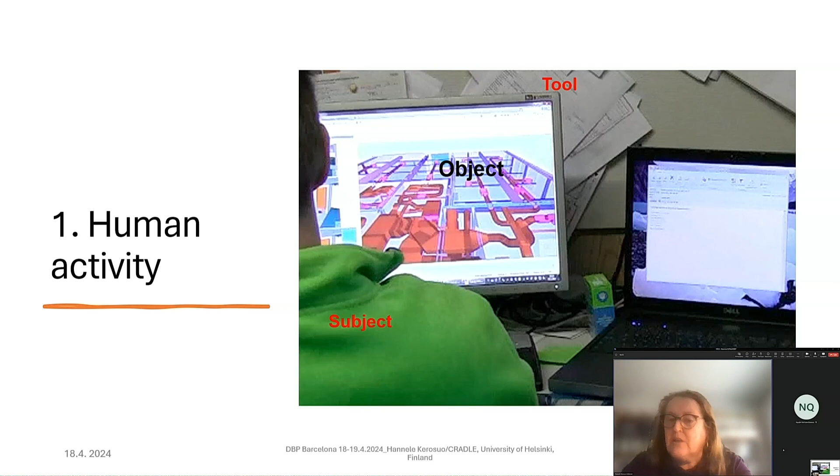The subject is certainly a member of some community or other, related to some other subjects. The community has also agreed on some division of responsibilities between them, as well as some rules. On the following slide, I will present the famous general model of human activity created by Professor Engeström. This is a very well-known model and used a lot in various places.

And as you can see, the object-oriented activity system is constituted of subject, object, outcome, instruments, rules, community, and division of labor. And the subject may be an individual human being or a group.

And then what we need to know about the object of activity is that it is more than the material or physical object. It also involves the purposeful target and motivation of the activity. It is something given by our context, and it's something we are anticipating. And what is important to know about activity systems is that it is constituted of relations.

They are not categories as they are sometimes understood, but they are relations interacting with each other within its socio-cultural environment that is constantly challenging these elements of activity. So activity systems are connected to other activity systems in real activities and practices. So there are two examples of connections between design and construction.

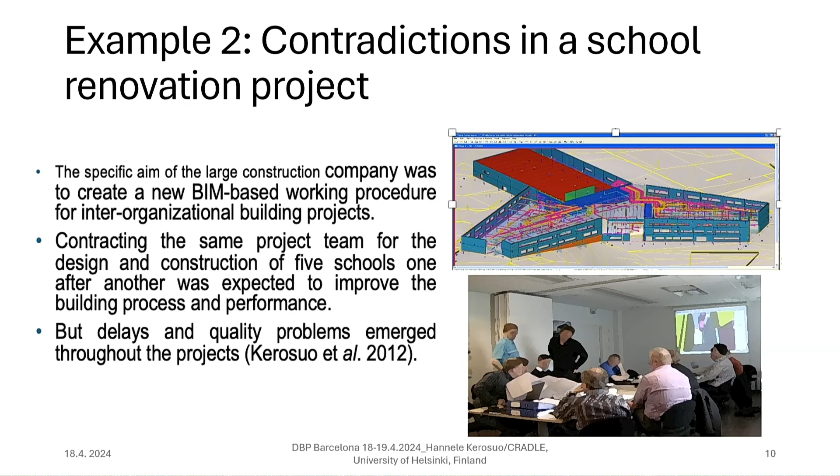So there was a school project where they were implementing BIM. And I think we have to go to the next slide so I can tell the example properly. So the contradictions emerged in this process between interfaces of participants, and they emerged in the interface between design disciplines, so that when they were running BIM models, there were real design errors, but they were difficult to see, there were plenty of them, and it was difficult to separate them from technical errors.

And even if they used this integrated model, IFC model, and as a consequence, shared use of the integrated model, they needed to create a special meeting and a series of them that lasted quite a long time, and also made the process slower, with some consequences to the building processes, so that in the interface between design and construction there were disruptions, because designs were handed over late to the construction sites.

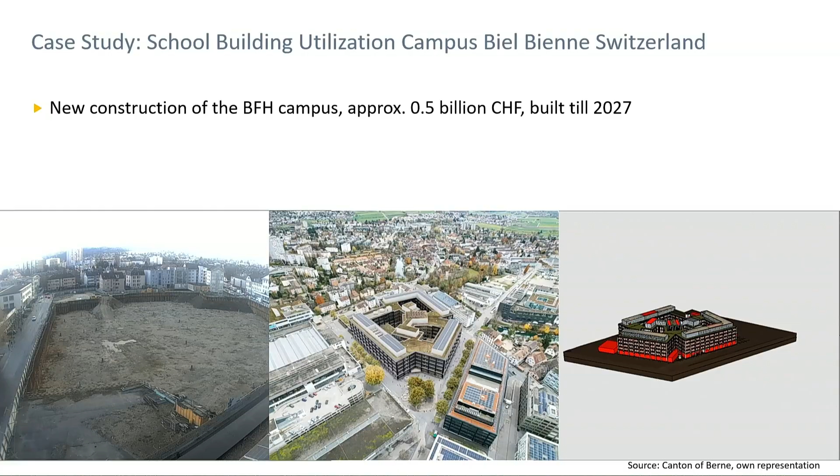So in 3 years it should be built, and the question was, we have maximum capacity while the term or the semester is going on, but what happens in between? I think you can see the bushes going through the floors at every university in the lecture-free time. So that was the main research question. What happens in the lecture-free time? What do we do with the rooms? What do we do with all the theaters, etc.?

What do we do? And yeah, that's exactly the point, how to maximize the use of this building while maintaining flexibility and modularity. So that was one of the main questions, and that led to some interesting questions, because the building permit is just for one purpose, education, and not for renting it out to the public or as a startup space or whatever. So it's just for educational purposes, the permit. What happens if somebody hurts itself in a startup space, which is in the university?

So interesting questions. So the fundamentals, I'm just clicking it through. I'm not sure about the time, but you give me the time. So left. Oh, okay. Okay, good. Got a heart attack, okay.

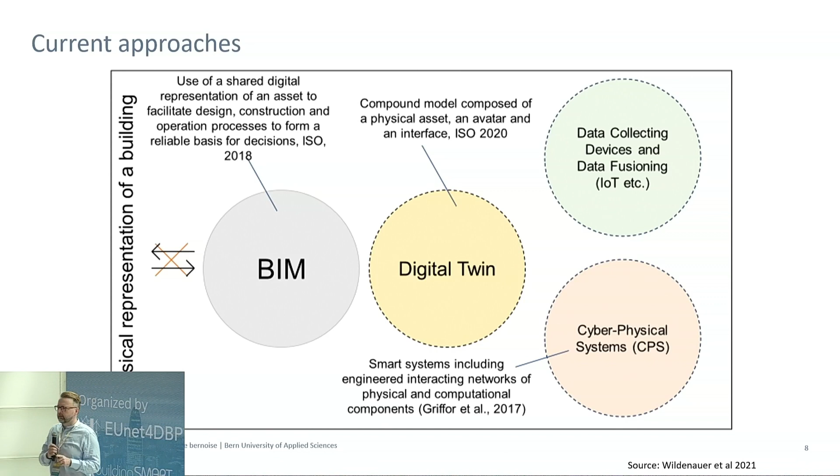If you talk about BIM, let's say we have 150 people here, we will have 160 different definitions of that. Exactly the same with the digital twin, cyber physical systems, and the data fusioning, as we called it, to get all the data necessary for the building. So what we need is more like this approach. We need to combine everything. And it will get more clear when I show the next slide.

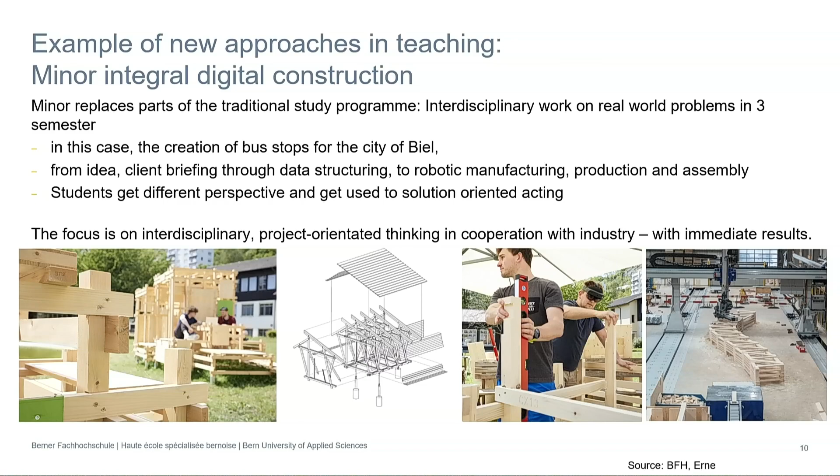So in this case, for example, the creation of bus stops in the city of Biel, we engaged the municipality, the community, local companies to come to schools and do the project with the students in the semesters. So from the idea, the client briefing through data structuring, the robotic manufacturing, those are our facilities, not the last one, but the first three images.

Production and assembly, we're really focused as an applied science university on what's going to be done actually. And the students get different perspectives and get used to solution-oriented acting. So by this, I would like to put the focus on the interdisciplinary, to have project-oriented thinking in cooperation with the industry. And that's really important, cooperation with industry. So industry, public and private aspects. That's what we do. In Biel, we try to be the pivot in the middle.

So just to finish, I think it is really important to say that the students, by doing this, have much more social skills than before. They focus on collaborating together, talking to each other, and the projects are only the intermediary aspects. They focus more on the processes, and I'm really happy that today we're focusing also on processes and not only on tools. Thank you very much.

Thank you, Matias. Any questions? Maybe I have a small question. How long have you been implementing these teaching methods in your university? And have you already seen some impact in terms of student satisfaction or also employability?

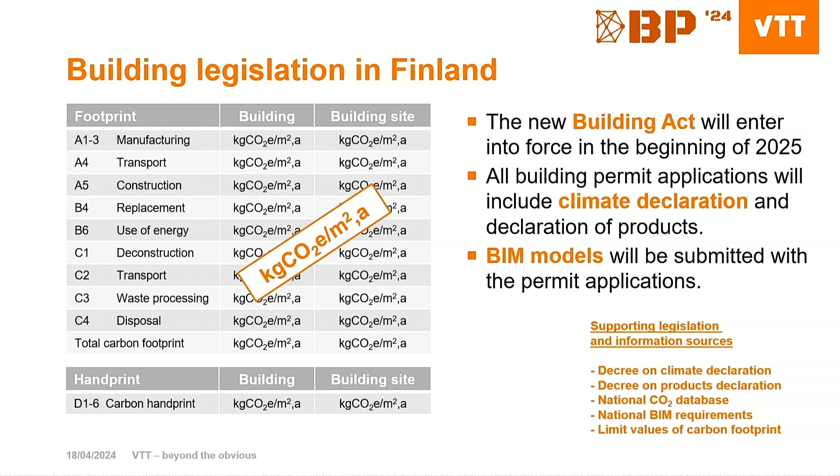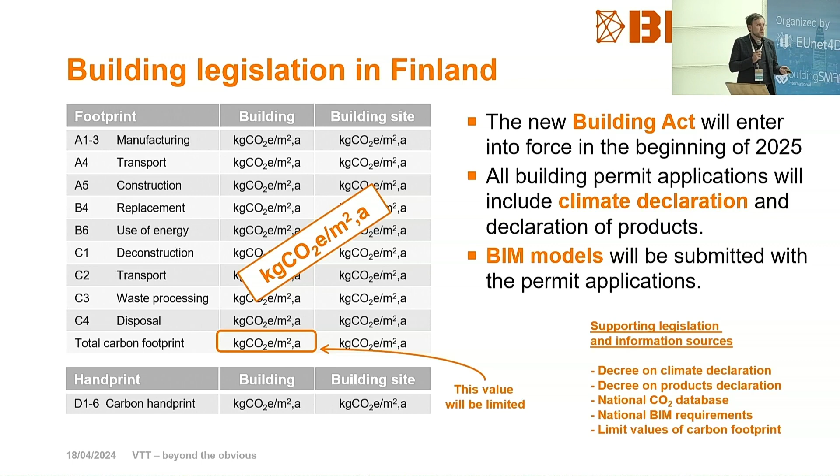And then limit values will be coming at some point, and these values will be limiting the total carbon footprint. So that is kind of expected, but we still don't know what these values are going to be. Well, if we look at the Finnish emission database, it is very similar to Ökobaudat or other databases that are around, or the Environdec collection of EPDs.

We have different materials and different impacts, usually in various units: per square meter, per cubic meter, per kilogram. If it is transport, it could be per kilometer, or per ton kilometer or something like that. So we have these kinds of impacts there. And some building services are actually very much simplified in the Finnish database. You don't really need to have them in the design for the building permit. You can just calculate this per square meter.

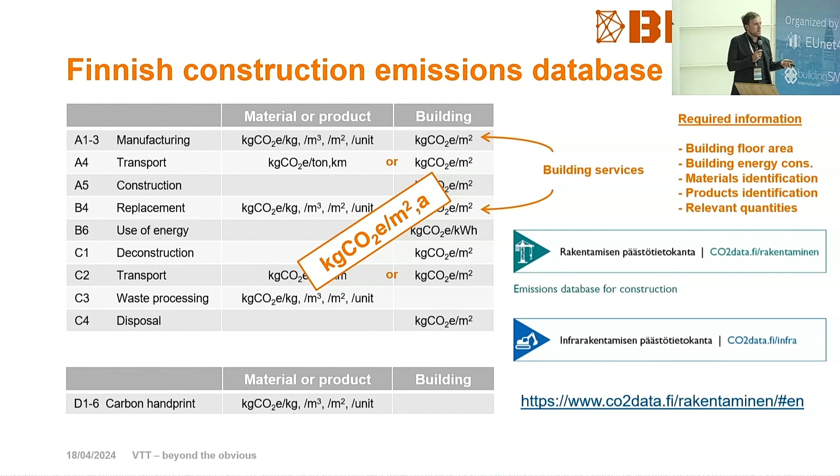You can take the value from the database. So at the end, you will have to end up anyway with kilograms of CO2 per square meter per year. And this can be done pretty much automatically. So we try to develop this kind of proof of concept tool where you feed in the model. It could be IFC step file, or it can be JSON, and with some connection to dictionaries and databases, you will get out JSON output usually with the results.

There's no possibility to demonstrate it as such because there is no user interface here, as you see. Everything is running in the background somehow. So it just looks like that. But there is a GitHub, you can download it, you can experiment with this. Basically, this can be running in the background of some administration service, or it can be some other tools integrating this thing.

But obviously, you are wondering about this quality of model data and how we are handling it and how we are making sure that what we predict is not really giving false positive values. So it is not unconservative. It is always conservative. So we have these points here that we are addressing. If it is missing material identification, we are still taking some material from the database, but we are always making sure that it is the highest possible material that can be used for this type of element.

If we are missing quantities, we are trying to calculate it with some conservative approach. If we don't have the exact material name that we are expecting, we have a mapping dictionary now, but we are now experimenting with large language models in the ACCORD project. So probably we will have this AI in the background.

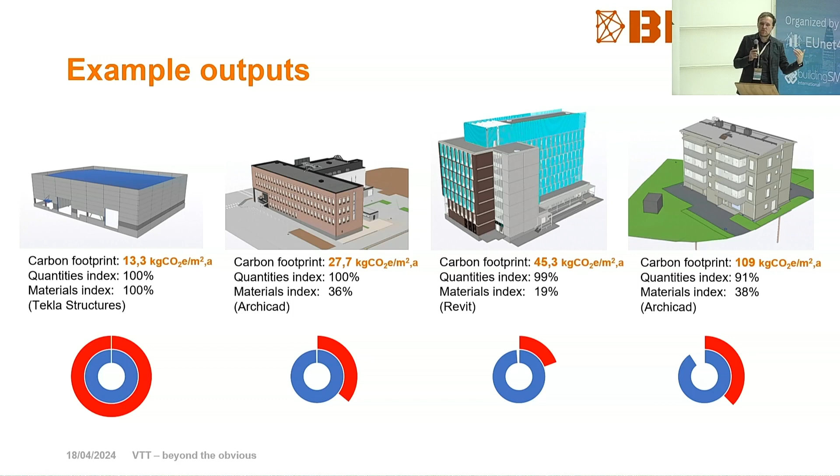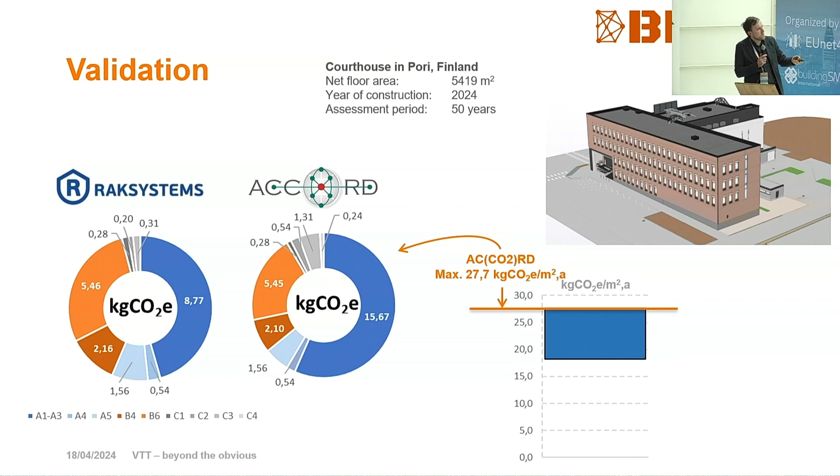Then we have tested it against a building. This is the courthouse in Pori, where the LCA was also done by professionals, by some software and experts, and they predicted 19 point something kilograms per square meter per year, and in this tool the maximum value was, okay, maybe I have it here, 27.7. Also we can get a minimum value actually, because it is taking from the pool of possibilities, so it was 18.2, and the official calculation was 19.3, so it is somewhere in the range.

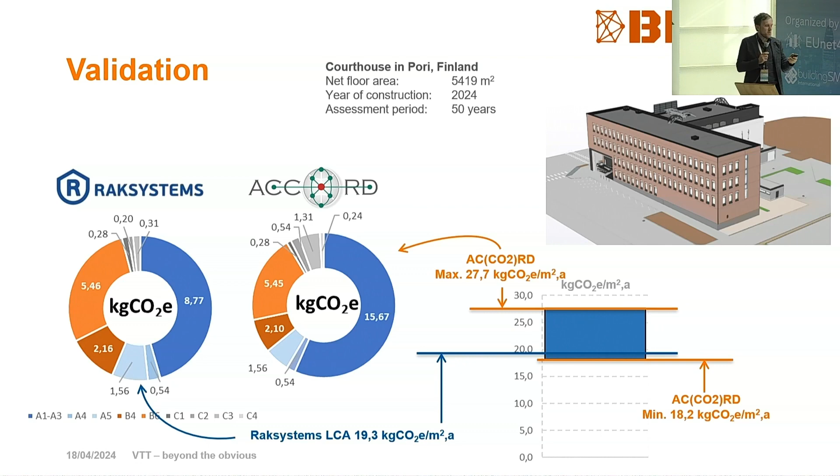I mean, if there is a limit of 30 kilograms per square meter per year, this calculation will pass, and you don't even have to pay the license and experts to do the calculations for you, because the model data is already showing that this can pass 30. If the limit is 25, you say that it is not passing, but it is possible to maybe improve the model to get better values. If the limit was 15, it is not passing, and you will have to not only improve the model, but probably redesign something, because even the minimum value is higher than what you should be getting. So this is the idea, and this is a proof of concept tool.

So of course this is the development stage, but we have it published in GitHub, so you can study it and try to maybe contribute with some ideas. It is adjusted to Finnish regulations, and we are planning to integrate it with machine readable rules for checking these limits. And we are now discussing with Solibri, Cloud Permit, and Future Insight if we can integrate it in some larger systems. So thank you very much.

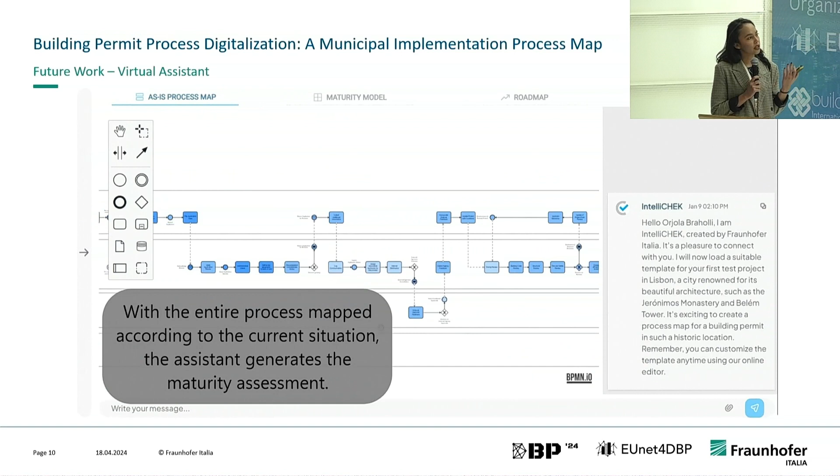And then the user can describe each step of the process. And then the virtual assistant will do this definition of the process steps and also of the current level of maturity. And once the process is completely done, the total current process of the building permit, the chatbot creates the assessment of the 4 categories that we have. And that's all for today.

Thank you, Orjola, for your presentation. Any question about the CHEK maturity model? Thank you for the presentation. I wonder if this maturity model is country specific or CHEK project specific, or do you intend to use this tool for every country? Also, is it at a national or municipality level, or an organization level? Because I noticed that there's an organization part of it. Do you imagine that it could apply to a specific organization if I want to adopt some level of automated compliance checking or digital building permitting? Is that suitable? Thank you.

Yeah. So we have 4 municipalities in CHEK from 3 different countries, and we did a lot of research on how building permits are done in different countries. So this is not specific to one country. The idea is exactly that we can scale this for different countries. It's more done at an organization level, not so much the national level, focusing more on the municipality or an organization that wants to implement a digital building permit. I think I answered your question. But yeah, the idea is that it can be as scalable as possible. The maturity model is not just related with CHEK. The roadmap is more specific, but you can also adapt it to other technologies, of course.

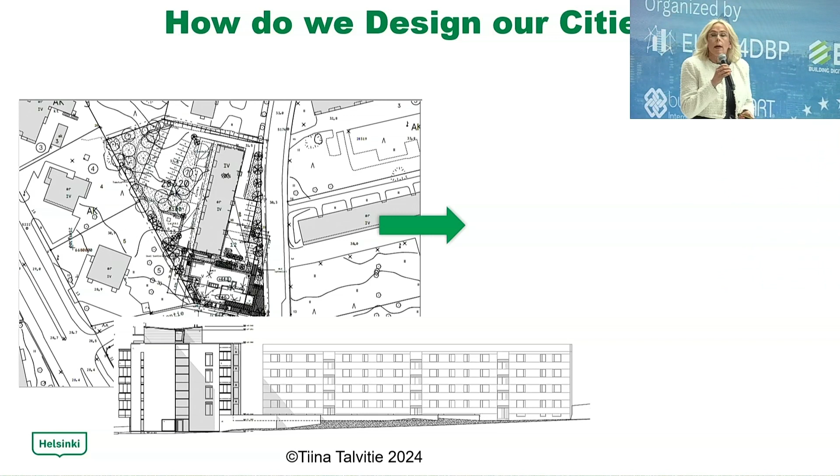And how do we design our cities? Here on the left, you can see materials related to the building permit process of a new building. The same material is used in a neighbor consultation. It's not so easy for the neighbors to understand how a new building would look in reality when built. How high is the building? How does it shade other buildings? Or what is its suitability to the landscape or to the surrounding nature?

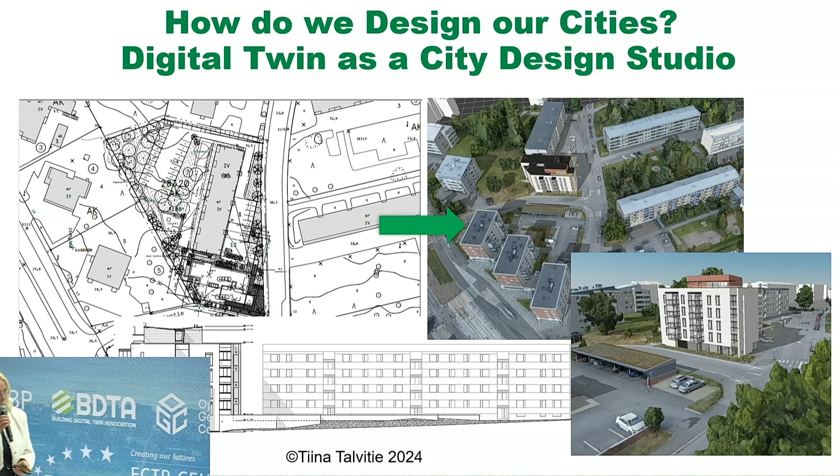How about if we would have a city design studio, likewise when designing cars? Here on the right, you can see the same new building embedded into our Helsinki 3D city model. In a digital twin platform, you can rotate the model and choose the viewpoints you like. The neighbors can also leave their comments related to neighbor consultation through the same digital twin platform.

So I ask you, what is the smart city maturity? How capable are we at utilizing digital twins in daily operations in our cities? Actually, how many 3D city models are integrated into cities' urban processes? Well, I think technology development is pretty fast, and we also have advanced software available. So why is the deployment struggling despite the advancements in technology?

Well, when commuting in the morning traffic to work, whether you go by your own car or perhaps you use public transportation or perhaps you go by bike, how often do you think about the technology of your transportation, horsepower, power transmission or something like that? Or do you more concentrate on getting to work on time, the comfort and safety of traveling?

Well, technology itself is not so interesting for the users. Technology is a great enabler, but it's not so easy to sell and convince customers of technical issues without practical use cases with benefits. So, would it be easier to start from the user needs, covering user stories from real users? Because users are always the best experts of their own work. So why not involve them in development work?

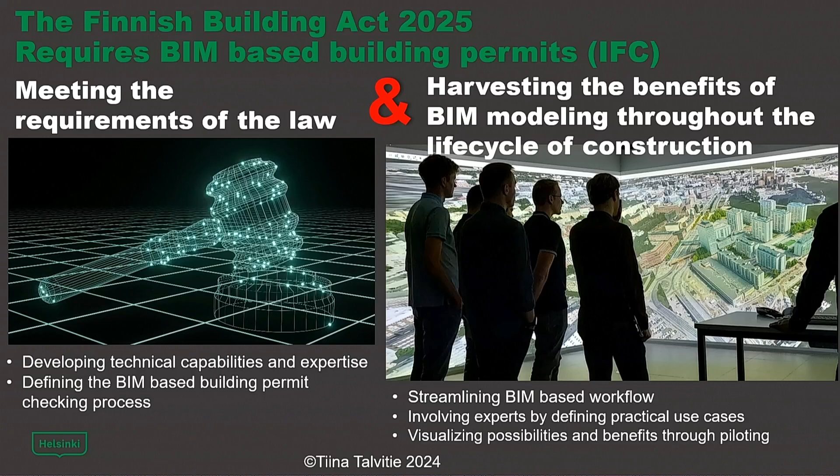And now it's time for the Finnish municipalities to start implementing the results of RAVA3Pro, developing technical capabilities and expertise, defining a BIM-based building permit checking process. But at the same time, this change presents a great opportunity to harvest the benefits of BIM modeling throughout the life cycle of building construction. We can streamline the BIM-based workflow, we can involve experts and create enthusiasm.

I think we need leadership for promoting digital transformation. We need a cultural change in mindset, or do we even need a cultural revolution? What do you think? We need to question traditional ways of thinking and working. We need leadership for leading people through this change with the power of experimental culture and also adapting lean principles.

In Helsinki, we have established a concept lab as a platform for experiments, for responding to user needs and user stories. The process starts from focused innovating in workshops. Our service unit people ideate, develop their ideas and define use cases. They combine their service unit's own data with 3D city model data. And our target here is to show, with practical use cases, the benefits and possibilities of digital twins.

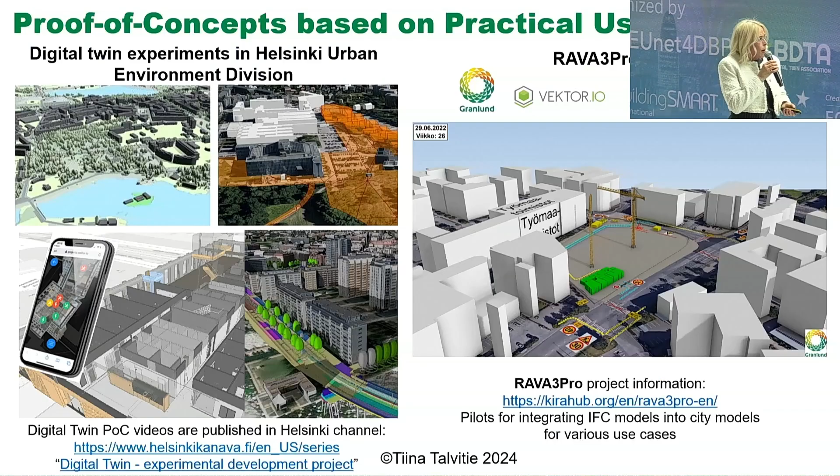These ideas are then conceptualized and pitched to a steering group. And we follow the fail fast principle. The winner teams get to implement their concepts as proofs of concept with financial support. Well, because of limited time, if interested, you can find examples of our proofs of concept on the Helsinki channel. These result videos are spoken in Finnish but subtitled in English.

And also in RAVA3Pro, we made plenty of pilots. There's an example of 4D scheduling. And I will show you now a very, very short video example of a proof of concept result project. It's related to the building permit process and neighbor consultation.

I hope you see the subtitles there.

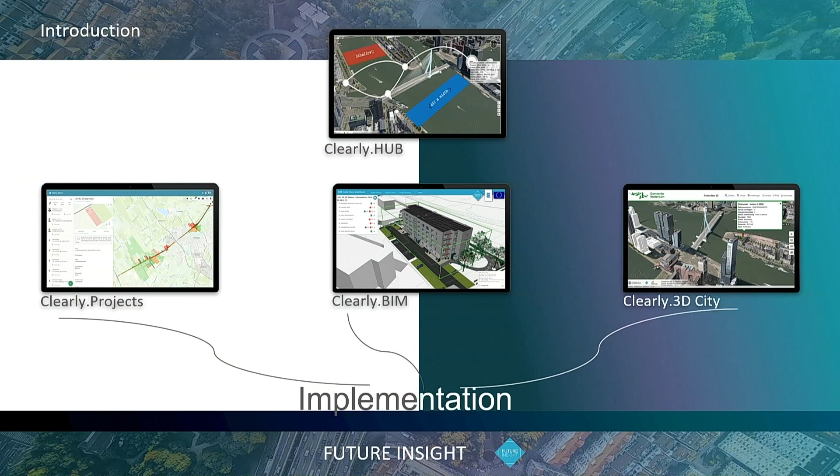We do exactly what is being talked about at this conference. As I briefly mentioned before, Future Insight has implemented BIM-based building permitting in Estonia. It is live. You can go online and apply for a building permit, and you can upload an IFC model, which you can do automated checks on, which you can visualize, and which you can link to digital twins, etc. But that's not all we do. We also do other stuff as well.

We think more broadly. We are developing Clearly Hub, which is kind of an integration layer between all kinds of information and data and the applications, because we see this problem everywhere in all municipalities and bigger companies as well. You have lots and lots of data, but people don't know about it. In different departments, they look for it, they recreate the data, but it is already there in many cases, and it's used by different systems, and it doesn't connect between different applications. So you need some kind of an intermediary layer, and this is why we started developing the hub.

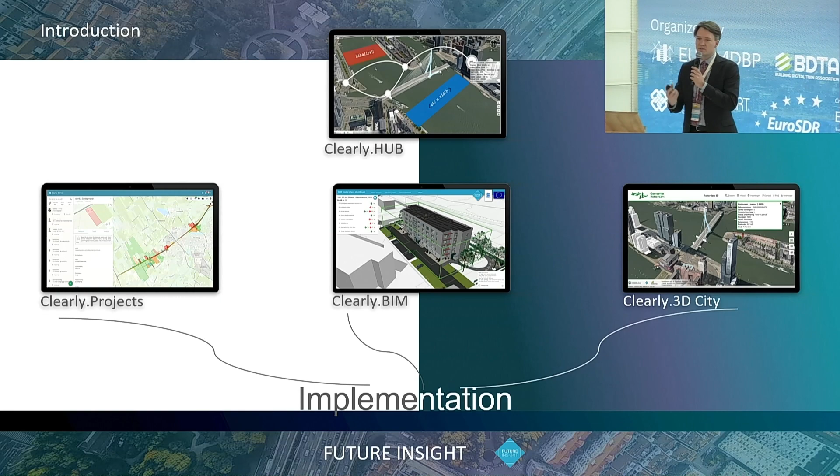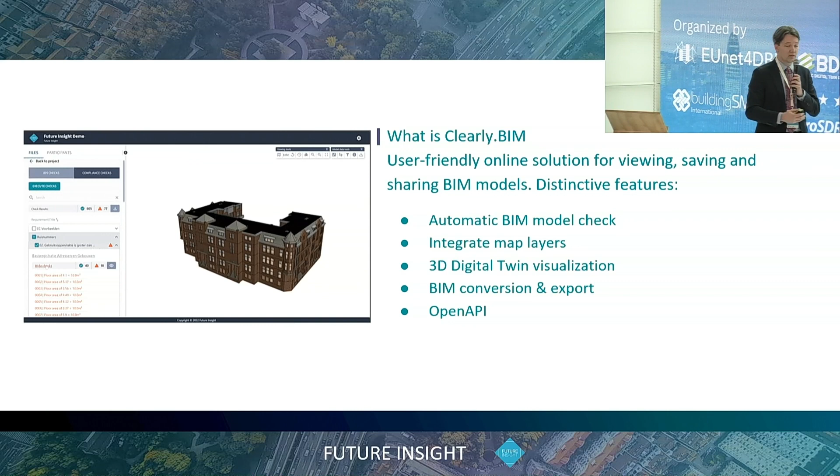But today it's all about building permits. Clearly BIM is a product we have been developing for some years now, and software development is a never-ending story. But it's something that we've already implemented as well. I have a few examples. But first, I would start with the why. You know, Simon Sinek, very good TED talker, made a really nice presentation. Why are we talking about BIM-based permits? Why do we need them? You can spend a lot of time on this, but I will give you 3 very simple reasons.

First of them is speed, efficiency. If we can automate some parts of the process, and you've heard it takes years, it takes months. In some cases, it could take weeks, of course. Usually it doesn't. But in many cases, it takes a lot of time. And of course, having automated compliance checks is not the only solution. The bigger problem is organizational. It is much more about applicants wanting to change the requirements. They don't want to check if they meet the requirements. They actually want to change them. So it doesn't solve everything, but it is a way to speed it up and make it more transparent.

Depending on your country, depending on the municipality, transparency is maybe a bigger or a smaller issue. In some countries, it's a very, very big issue, and it's probably the main reason why you would want to automate this process. But either way, it gives transparency, and it also standardizes the way we do checks. This is something that you shouldn't neglect. Especially when you're talking on a country level, it helps so that all the municipalities can do it the same way. It's not about who you talk to and in which municipality.

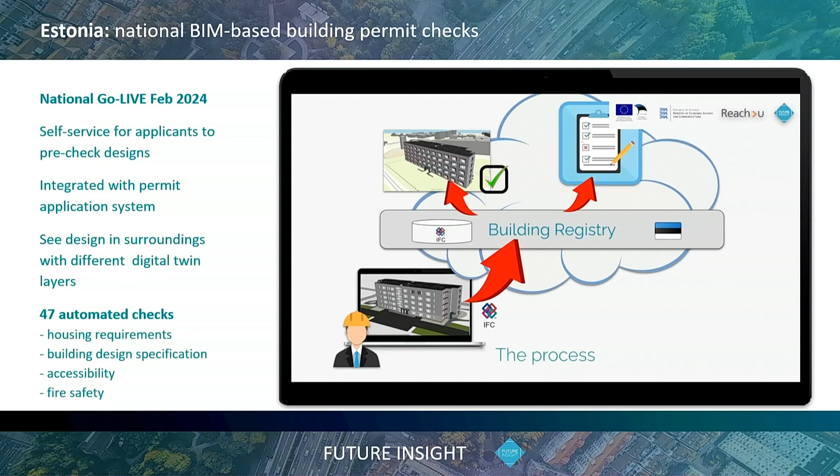But a little bit about two projects. One is the Estonian BIM-based building permit system, where we integrated with the government system, clearly BIM, and it's a self-service solution. It is totally integrated with the user interface of the government building permit system, where you had the PDF stuff and everything and all the workflow management.

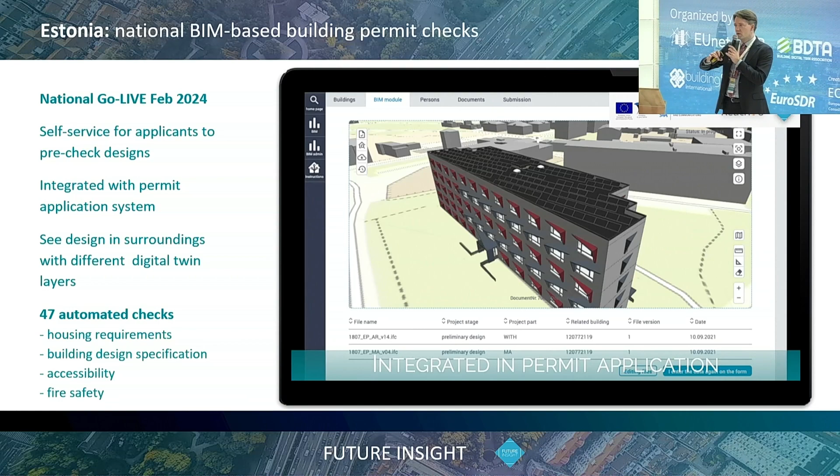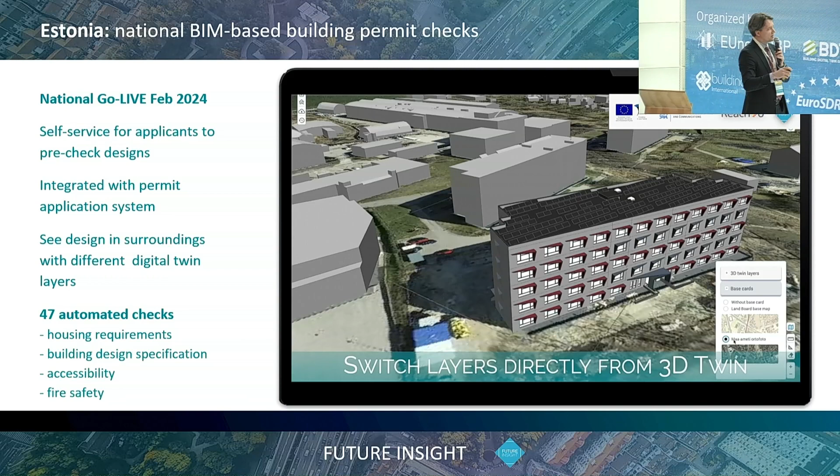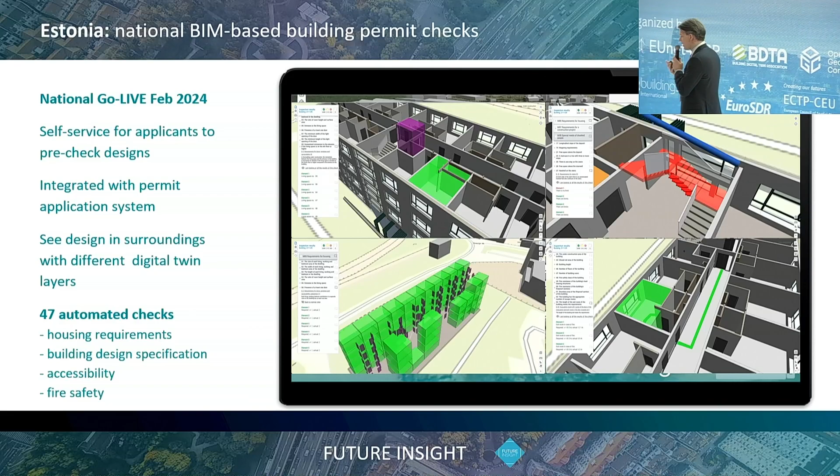But now you also can view BIM models, and you can view them in the surrounding, taken from the digital twin, in context. And in total we have 47 automated checks: accessibility, housing requirements, safety, fire safety, etc. Not going to go through all of them here. You can go to Estonia and apply for a BIM permit, then you see what I'm talking about.

But also another project which I would like to highlight is a pilot we did together with many municipalities and several other companies in Finland. Anna-Riita is here. She can talk about this project probably more. Her session is tomorrow, so be sure to check it out. And also Ilka from Cloud Permit. We did this together with them.

We integrated, again, clearly BIM with the Cloud Permit system, which manages building permits in most municipalities in Finland. But there it's slightly more detached from the system. In Estonia, it's very, very tightly coupled with the government system. But again, this is the flexibility you have nowadays. You don't have to put everything into one big system. It can be linked and integrated with several systems through APIs, etc.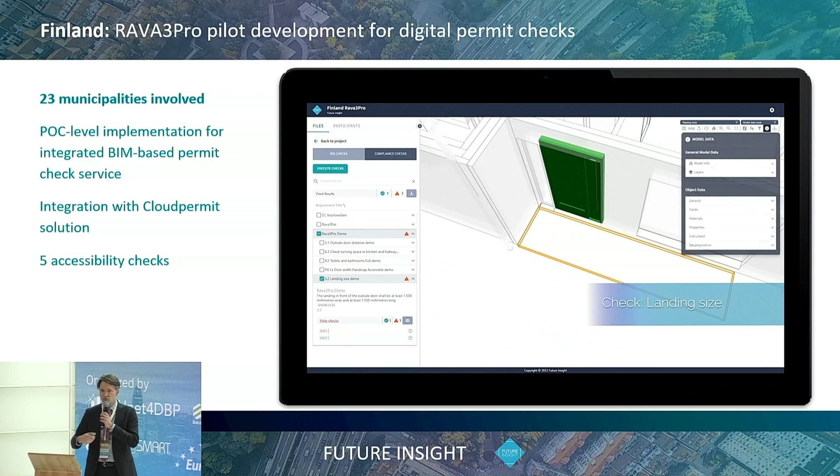And there were a small number of checks done there, just 5 accessibility checks, but it was a really good start for a lot of municipalities, and there's talk now of improving that and taking it further. But yes, technology is there. It's simple, but what is hard is implementation.

So what is the call to action? What should you do? As I said, technology is ready. You should start sooner rather than later. And start small. You don't have to think about every single thing. You don't have to boil the ocean. What you have to do is start and do it in an agile way, in incremental steps. And you find that it's not that hard.

A key aspect is to always use open standards. This was a discussion here as well. But I'm a very, very strong supporter of open standards because they give us interoperability. They ensure that you're not vendor locked in, because the data is always accessible and open and you can use it everywhere. And collaborate.